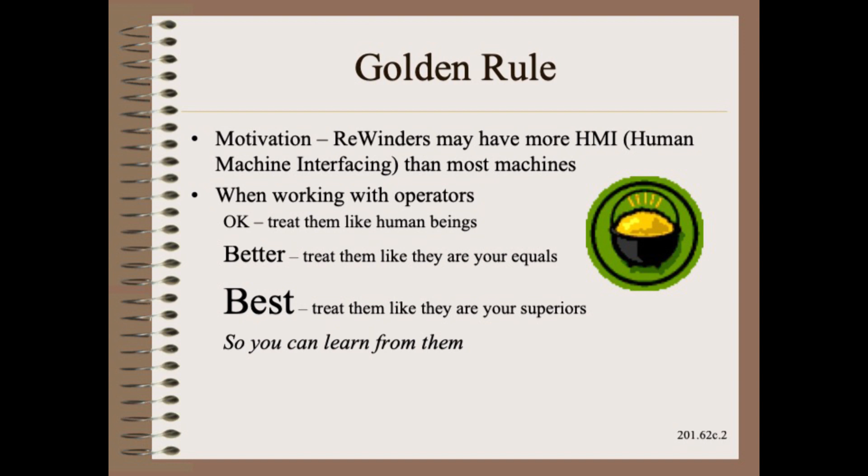The motivation for this section is simple. There may be more human-machine interactions on your winders than most any of the other machines in your plant. Just as you want to keep your machines in good working order, you also want to keep your operators in good working order. Some of this relates to job-specific training, while some might be related to aptitude. But here, we will consider attitude.

The very least we should do is treat operators as we would treat human beings. Better yet would be to treat them as equals. However, to get the most from operators, I would suggest treating them as your superiors, at least in some ways. In general, operators should know how to run their machines better than anyone else, including you. If not, something may be wrong, because that is their job.

There are many case histories of unions going on strike and where the engineers and supervisors were forced to run the machines. It was not pretty for weeks and sometimes even months. Another thing to consider is that operators spend more time at the machine and thus may notice more things that might be indispensable for problem solving.

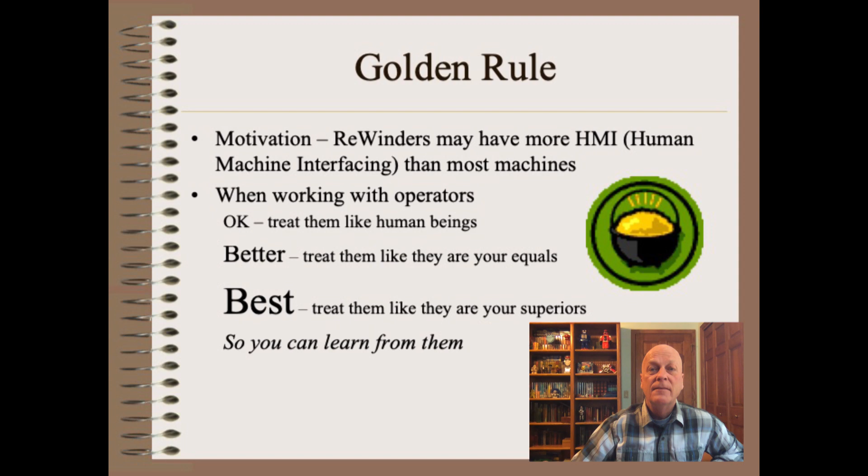Nobody likes a know-it-all, even if they know a lot. Some humility is helpful even if you purchased, designed, installed, or started up their machine. Also, be sensitive to when you intrude on a process. Some times are better than others. Another thing operators hate is targets. True, sometimes targets may have their place. However, this does not make them more attractive in the eyes of someone who may already be trying to do their best.

Another thing operators hate is paperwork, because they suspect that some of it is just busy work. Guess what? Much of it is. Most data is never, ever used by the process engineers who originally requested it.

There's a saying that if mama ain't happy, ain't nobody happy. This also applies to operators. If they are not happy, or at least satisfied, no one will be happy, including supervisors, CEOs, and the board of directors.

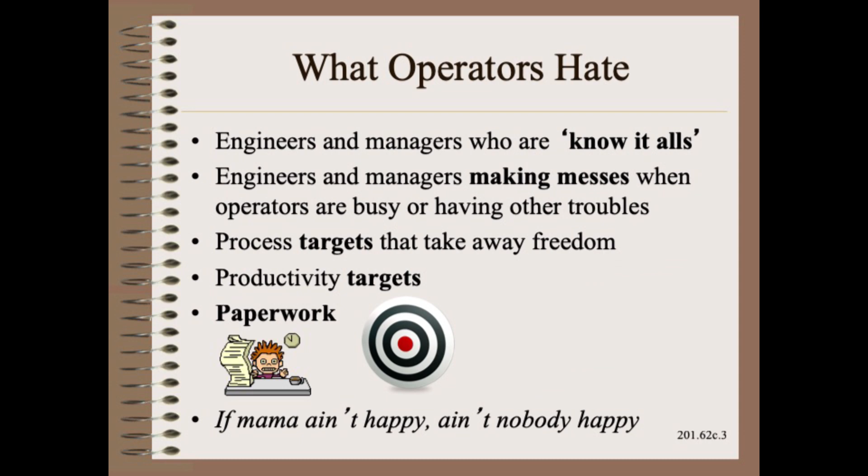Job-specific training is vital. Even the simplest winder has as many controls as a light aircraft, and a coater laminator could have as many knobs and dials as a small jet airplane. Yet, as important as formal training is, it is often not available. Most training is done ad hoc, where the last operator teaches the next, and so on. After only a few generations, the operators might not even know the names of the parts of their machine.

Formal training for converting machines is generally available only from two sources, each with their own pluses and minuses. The OEM, or machine builder, might supply training that is specific to that make and that model of machine. Here we are dependent on the skill and the effort of the builder to construct a useful combination of classroom training and hands-on training and, most often missing, training materials. Yet, done well, this training may be the best for some situations because it is tailored to a particular machine. Unfortunately, training such as this is rarely offered and even more rarely purchased.

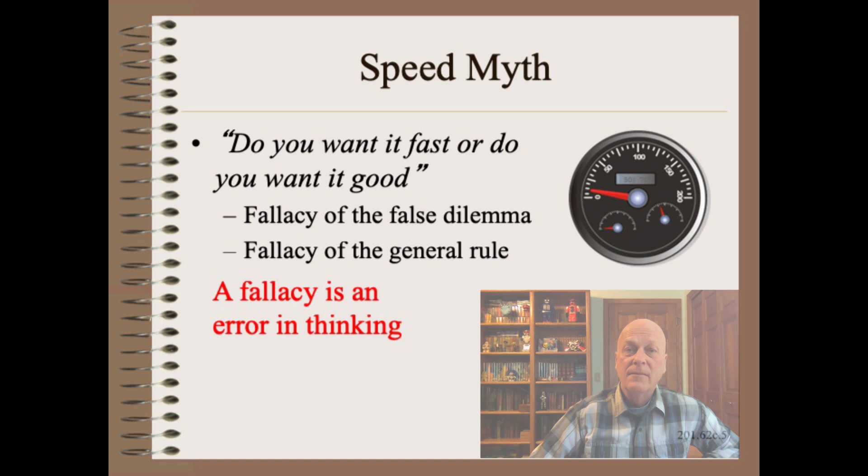The productivity and product quality coming off a winder does depend to some extent on the attitude and aptitude of the operators. There are many subjective hints on how well they are doing, yet I think most of us would prefer an objective measure of operator performance. However, before we start with things that might work, let us start with things that may not work so well at all. The most obvious would be to try and compare shifts.

Sometimes you might find the night crew is less productive. But that could be beyond the operator's control because there is less supervision and less resources, and people working at night or rotating shifts are in perpetual jet lag. In other cases, the day crew might be the slowest, and that could be due to interference by engineers or management. Similar issues can happen by comparing overall defect rates.

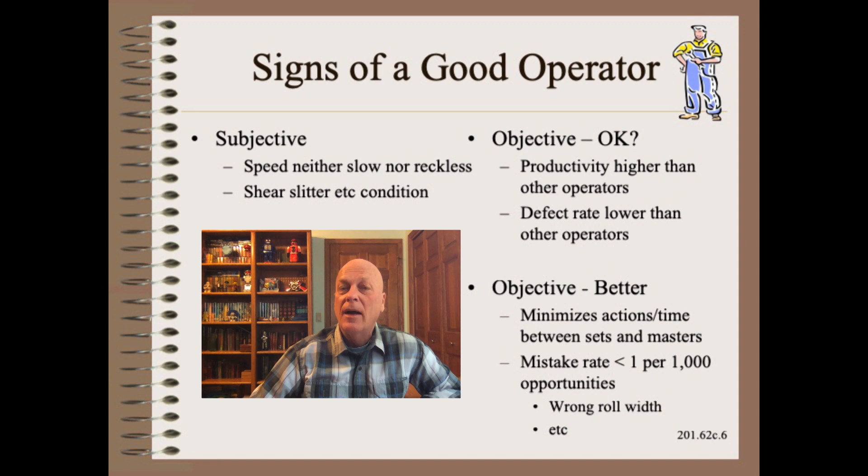Instead, I would like to propose some objective metrics that are unique to the skills of a particular operator. The first is the time to change a set or master roll. The second is the defects that only an operator could be responsible for. An example is setting the slitters incorrectly or getting the wrong roll width.

The layout of the winder area can have a large influence on productivity. Desirably, aisles are straight and wide so that operators and maintenance alike can easily service the machine. This is best done when a plant is laid out and the machines are installed. Yet, even after the fact, you can squeeze more productivity by getting crap out of the way that is seldom used. One example is parts and odd supplies. Another common example is control boxes and piping that impinge on a walkway.

Perhaps my favorite management program of all is 5S. It can be summarized as everything has its place. It is important not to make an operator unnecessarily uncomfortable. Perhaps the simplest yet often overlooked are floor pads for standing and low-arm padded chairs for sitting. However, sometimes it is possible to make the operators too comfortable. A common example here is the control room that can distance the operator from his or her machine and product.

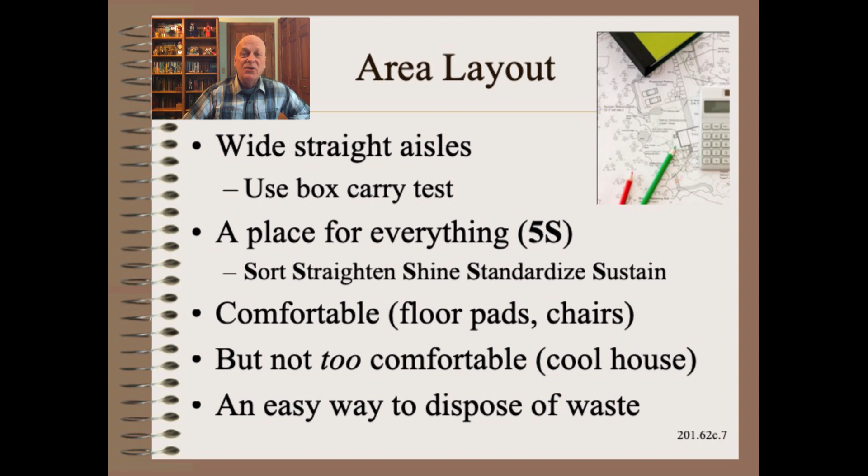Since I've never seen anyone wear sunglasses in the some 1,000 plants I've been to, it is probably safe to assume that there is not too much lighting anywhere. Instead, there is an epidemic of grayness and gloom in many plants. Perhaps it is due to an energy crisis, or perhaps it is causing an energy crisis. In any case, there are many practical reasons to improve lighting, such as to improve web inspection, roll inspection, reading paper, reading tape measures to set slitters, and so on. You might be able to buy a bank of lights for the cost of just one single wrong roll width caused by poor lighting.

Details matter, of course. Adding more overhead lights is not always the best situation because of the shadows cast by in-between frameworks and other machine elements. Instead, local diffuse lighting tends to work much better.

Operators tend to perform better when machine elements help rather than hinder their efforts. No place gets more time and traffic and thus demands more attention than the benchboard or operating panel. A good benchboard allows comfortable operation while sitting or standing. Vertical panels, and especially ones that block the view of the machine, may not be so helpful. Chairs should be comfortable, but easy to get on and off. Floor pads greatly reduce fatigue, but can be tripping hazards unless they are beveled and have a good color contrast to the floor.

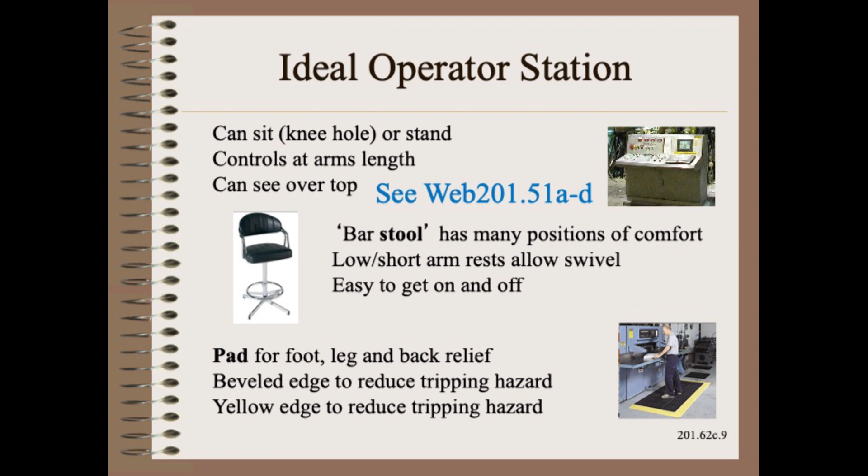If it looks like your control screen or control panel was designed by people who haven't operated machines before, you would probably be right. What we expect, at the very least, is good organization. On panels that have full graphics capability, putting up a schematic of the web line first can help force organization by putting I/O right next to the element that it corresponds to.

One area that's almost always overlooked is a simple shelf for writing, because paperwork will be with us for most of the time to come. True, people improvise, but the results are not nearly so pretty as if they were built into the panel to begin with.

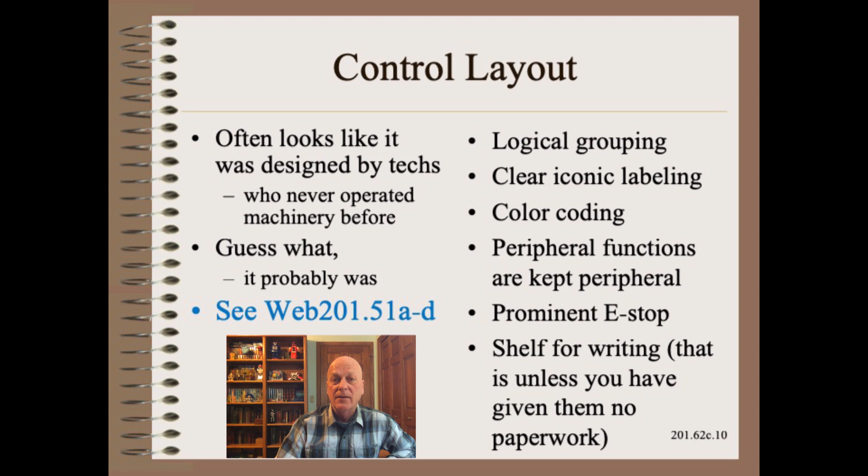Thank you so very much for allowing me to share this brief treatment of rewinder and R2R converting machine productivity.